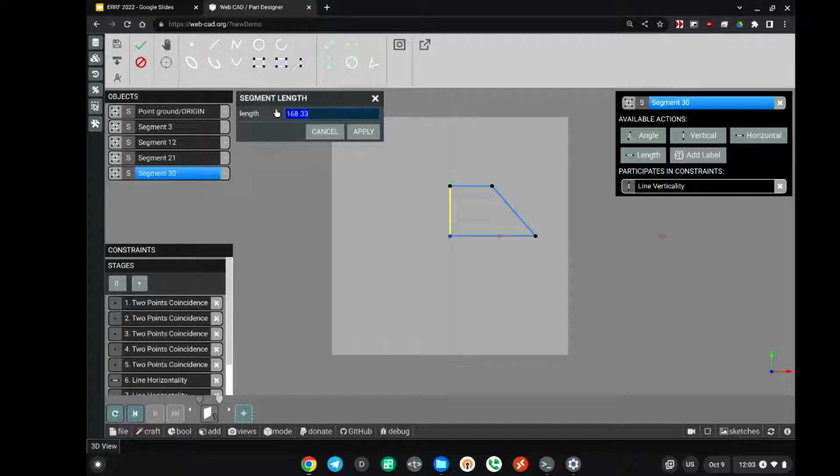I can go through and add in some dimensions. So maybe I want to go and set this to be 45 millimeters tall, and maybe I want to set this to be 60 millimeters long.

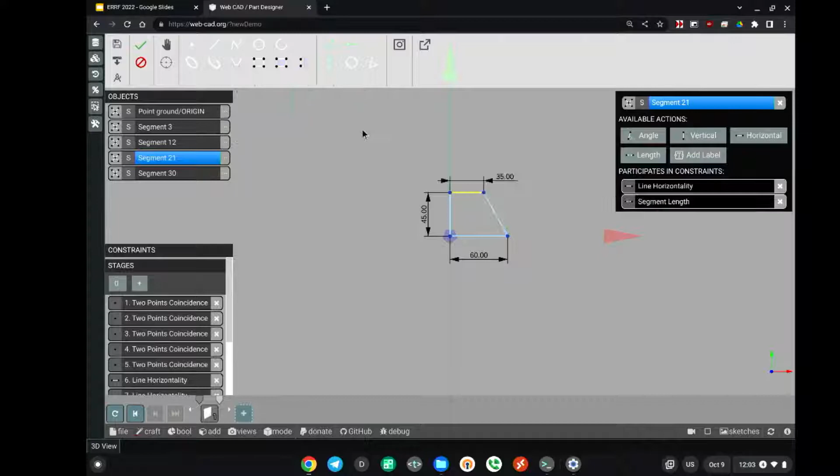And there we are, I got some constraints on there. You can see that things that are fully constrained turn blue, so you can keep track of what needs to get locked down and what isn't yet. If I add one more constraint here, we'll make this thing 100% fully locked down. So there we are, we have a fully constrained sketch. I can hit the little check box here to save that sketch.

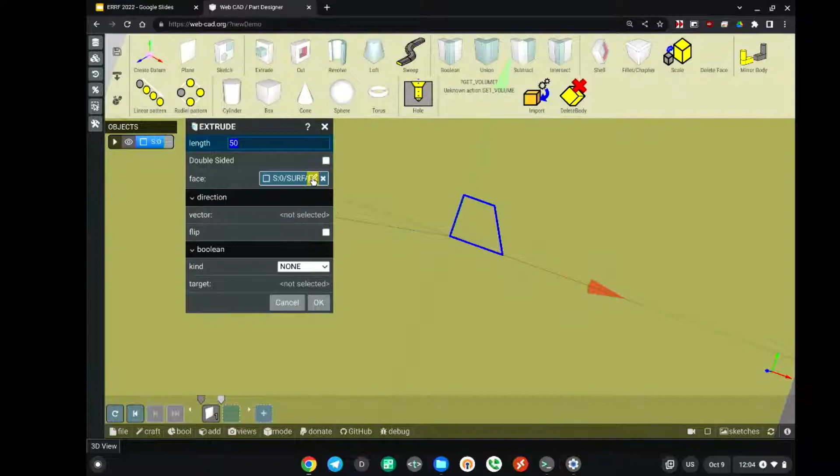Now I can use it to create some 3D features. In this example, I'll go through and do an extrude. I can specify the length of my extrude here. This right here is the selected face, which is that plane. If I want to go back in and edit that sketch, I can always click this little icon to go back in and manipulate things if I need to. But once I'm happy with it, I hit OK, and now we have a three-dimensional object that was done entirely right there in the browser.

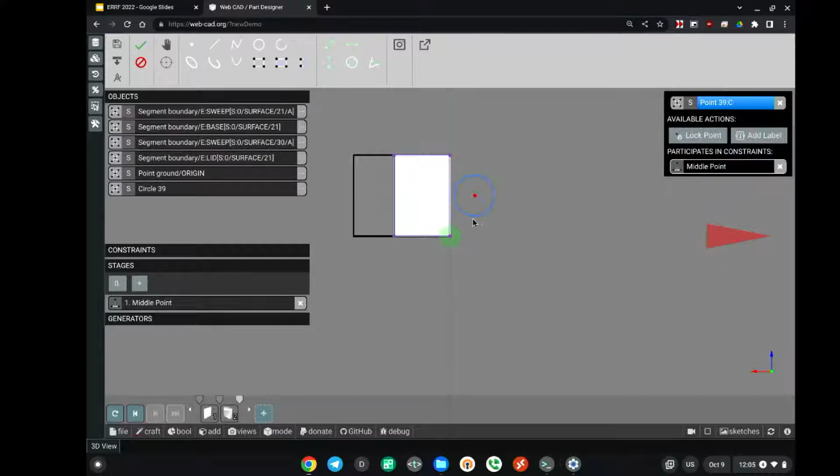Now, if I want to continue editing this and add more features, I can click on here and make another sketch right there. Let's just say I wanted to make a circle straight up in the middle here. I can draw a circle, and if I pick the center point of the circle and one of the boundary edges of the face, I can say point in the middle. So now that is locked in at that midpoint of that line. And if I want to lock that onto the midpoint of this other line, I can pick those two things, the line itself and the center point, and do another midpoint constraint.

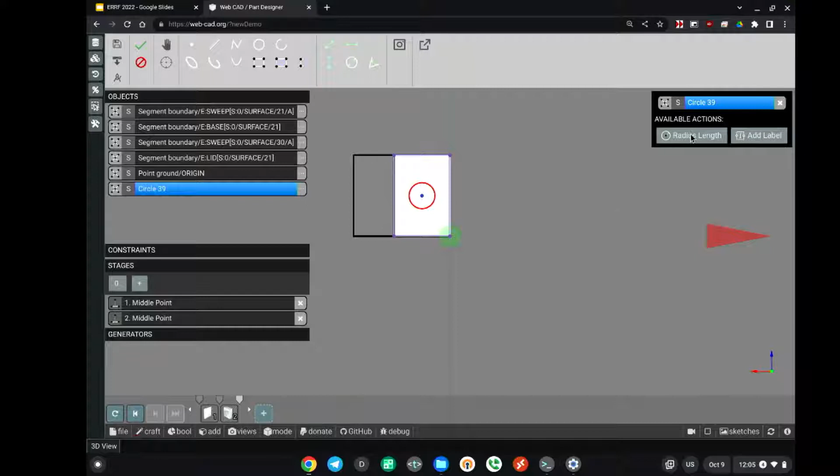So now this sketch just needs one more constraint to be locked down. If I set a radius on here, let's just say 5 millimeters, hit apply, and now this sketch is fully constrained. Now, of course, if I don't like that number, I can just double click on that dimension and change it to a different number, and finish off that sketch.

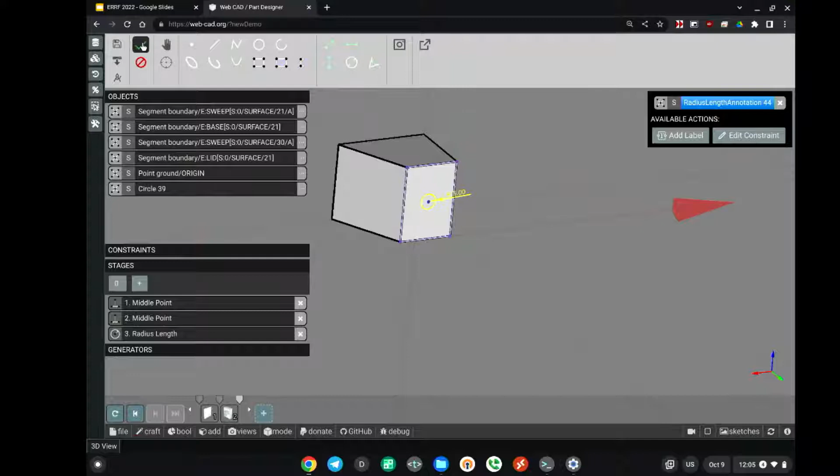Oh, where'd it go? Uh-oh. There we are, okay. Well, you know, this is what happens when we have beta software. I think the sketch is still there, so I'm going to try to make a cut with it. And I expect that maybe it doesn't work. Okay, that's lovely. You know what? I think I know what's going on here. There's something going on where if I only have one line in the sketch, it doesn't export properly. So I just added something else and made it a piece of construction geometry. Oh, well, maybe not. Well, that's nice. I love doing live demos.

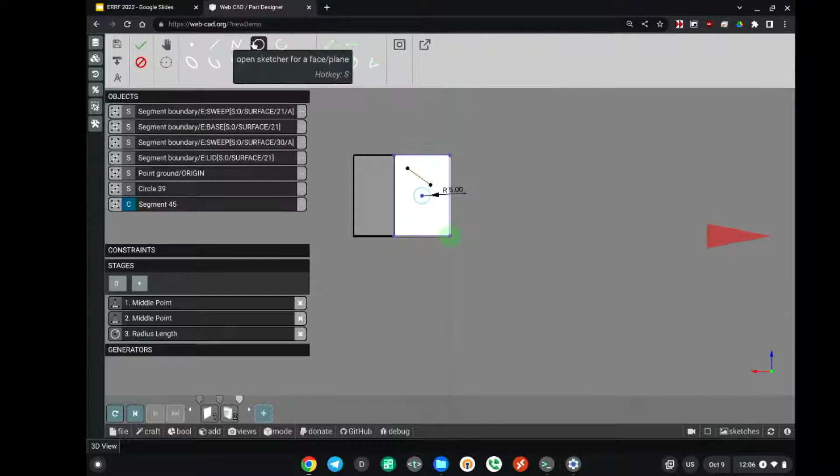Let's just try tossing something else in here, see if we get anything. No. Let's see, do we get anything? Well, I don't know what's going on there. Let me try a different face.

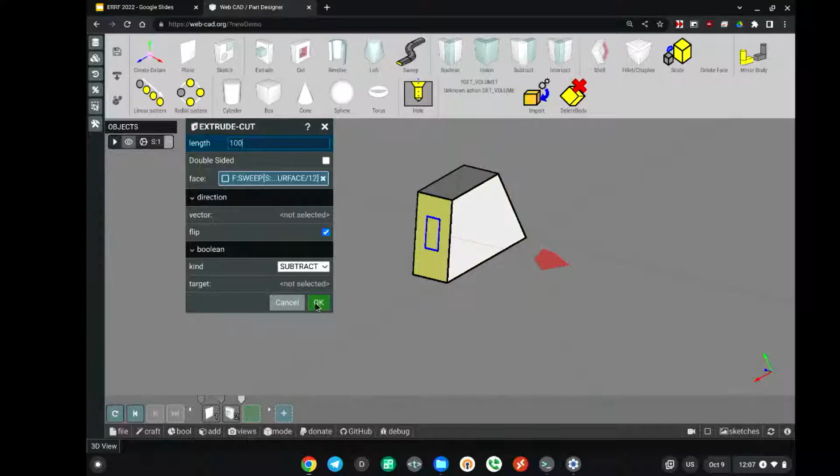I'll just draw a rectangle on this face here, and we can finish that and do a cut with that. So this is going to cut through the object, and I can set a distance on that. I'm going to set a distance that's farther than the opposite side, and we'll go through and make a cut in there. So that was done right there.

I could do some other stuff like adding fillets to an object. So if I use the fillet command, I can select some existing edges and it will round all these edges for me.

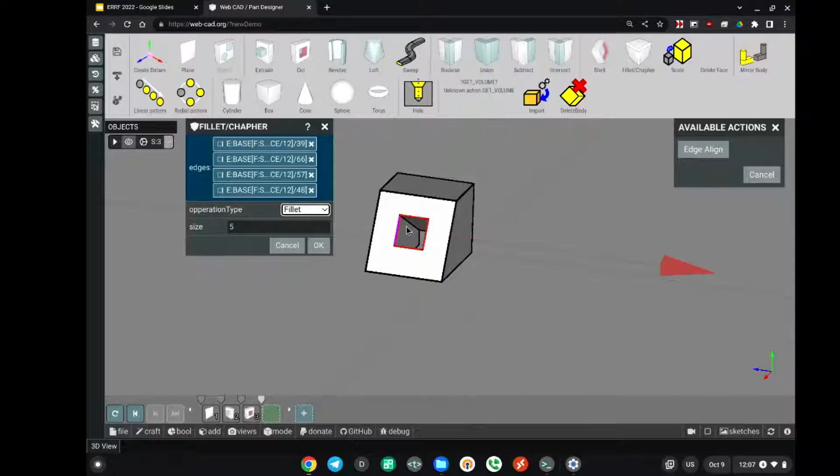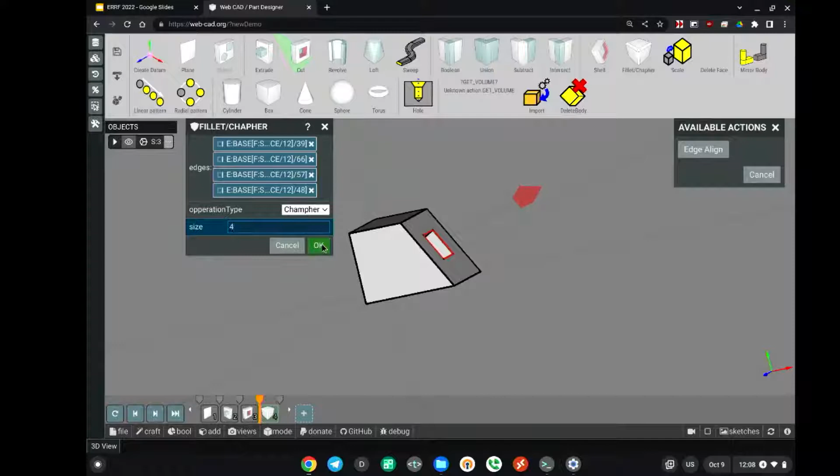Now, the nice thing about having an actual parametric modeler is that I can go back in time and tweak things if I want. So if I go back and edit this fillet, maybe I don't want that to be a fillet, maybe I want that to be a chamfer, and maybe I want the size to be 4 millimeters. If I change that, there we are. It went and adjusted the object and recomputed it.

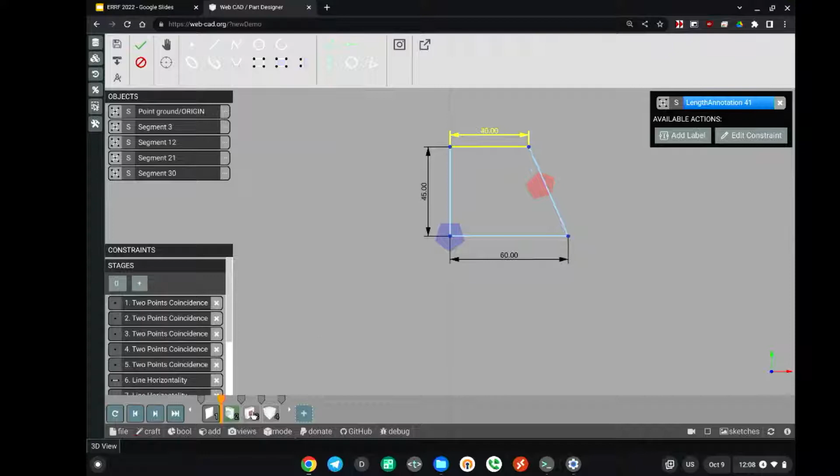And I can go back in time all the way to the beginning and change things. So if I wanted to adjust the size of this edge, maybe I want to adjust that, I can change that and finish off the sketch, then step all the way back through to the end of the part history and have everything update for me.

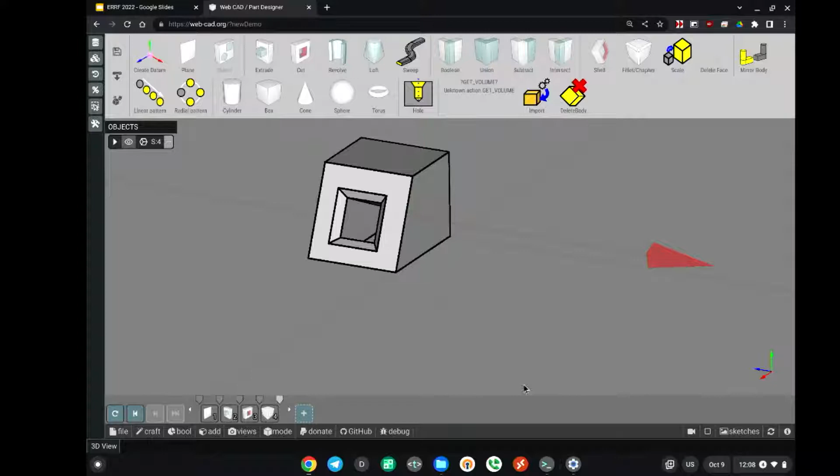That's the beauty of parametric modeling, and if you're used to SolidWorks, NX, or Fusion 360, this should seem very familiar. But the real beauty here is that this is all running on a Chromebook, so there's absolutely nothing for you to install. You can bring this into a school or any other locked-down environment. All you need is a web browser and you can start doing things.

Now I'll do another demo where I show the lofting functionality. We have the capability of doing lofts and revolves, so I'll do a loft demo here. Let's just start up a clean model.

We can start off and create a couple of datums. A datum is kind of like a three-dimensional axis that you can move around. You can either enter in numbers for it or click and drag on things. I'll create that datum over there, and I can create a plane on that datum. I'll make another one and position it over here, and maybe adjust the angle on that one by adding a rotation, so we get something that's a little bit at an angle there.

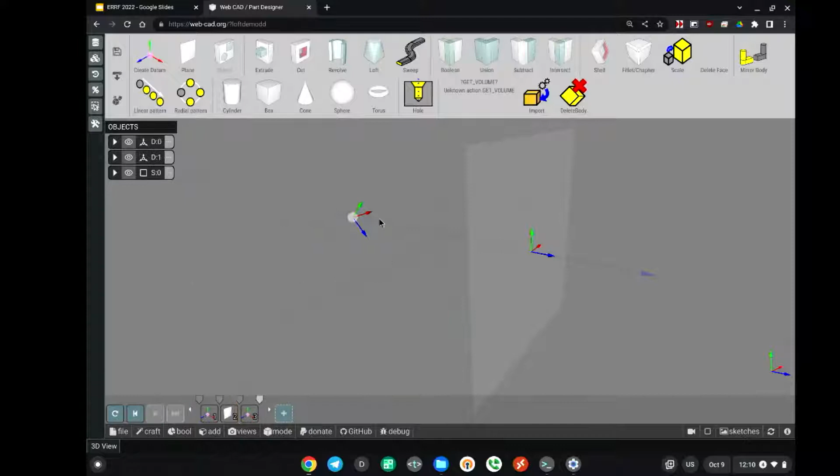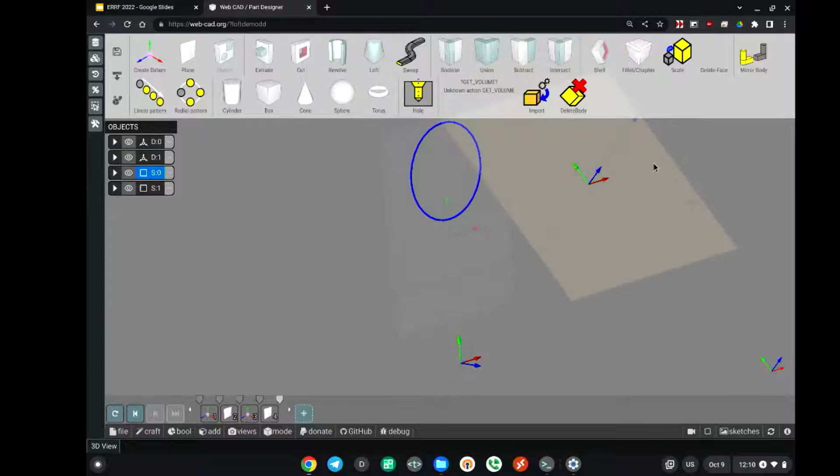And I'll create a plane off of that, so now we have two planes on different axes. I can sketch on here, and I'll draw something like a circle, and then go over onto this other plane and sketch something, like a rectangle over here for fun. Now that we have these multiple planes with different geometry on them, each one is a single closed loop.

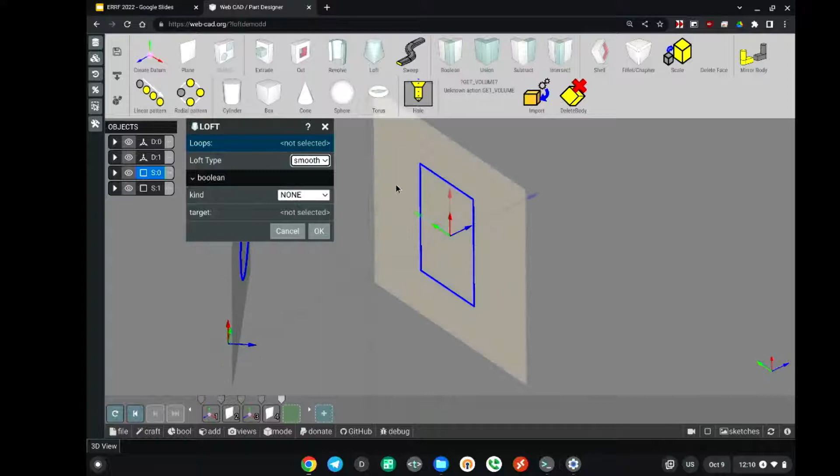We'll be able to go and use the loft command, and we will start from this one. I'll click that one, and then we will end over here, and we will create that loft, which will go in between them.

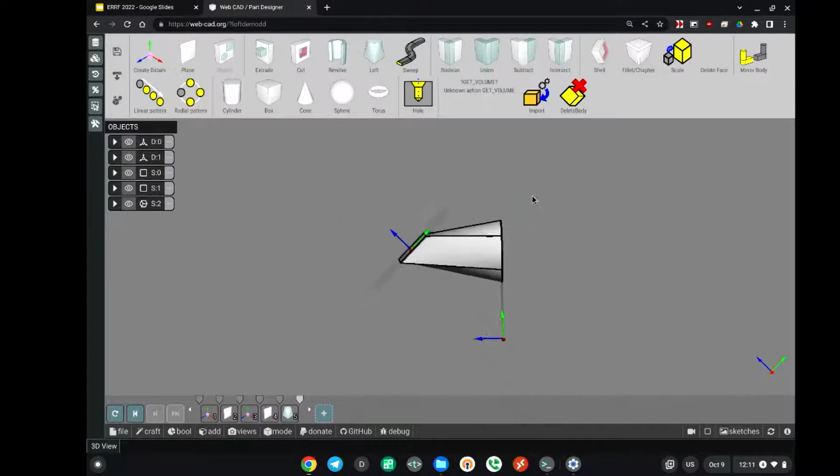We can do either a sharp kind of thing like that, and you can actually do this through multiple sections if you want. So if I go and delete that, and add one more datum out here, and adjust this one's location so that it's a ways away.

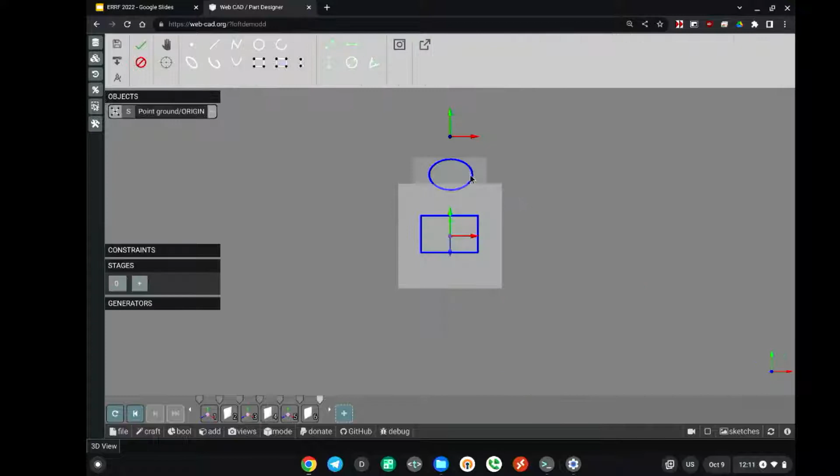I can create another plane on here and draw a sketch on that, and I'll draw another shape like that. We can go through each of those shapes. So if I do my loft, I can go from here to here to here, and we can see that it's going to smoothly make a solid that goes through all of them.

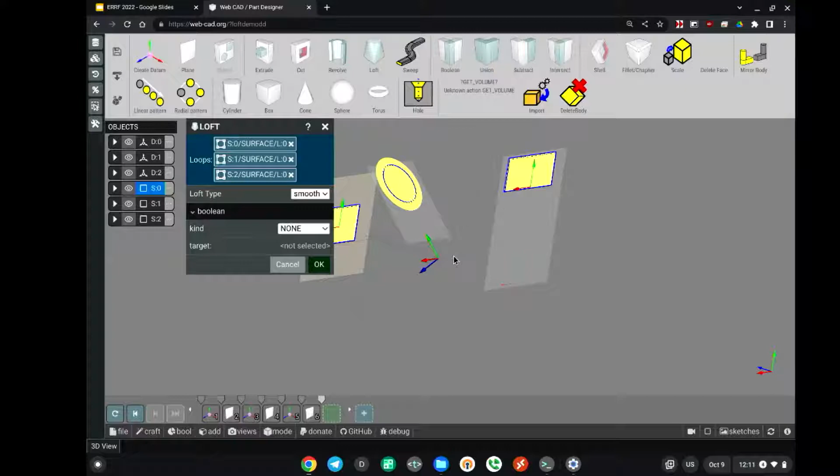If I change that, if I turn that into sharp, it's going to just go and basically do each segment separately, rather than trying to do something nice and smooth. This will allow you to make some nice, really complex parts, maybe like hand grips, things like that that you're working on.

So let's switch gears and look at the revolve command, because we have the revolve command in here. It's pretty easy to use, so I'll do a revolve demo here, and we'll open up a clean part.

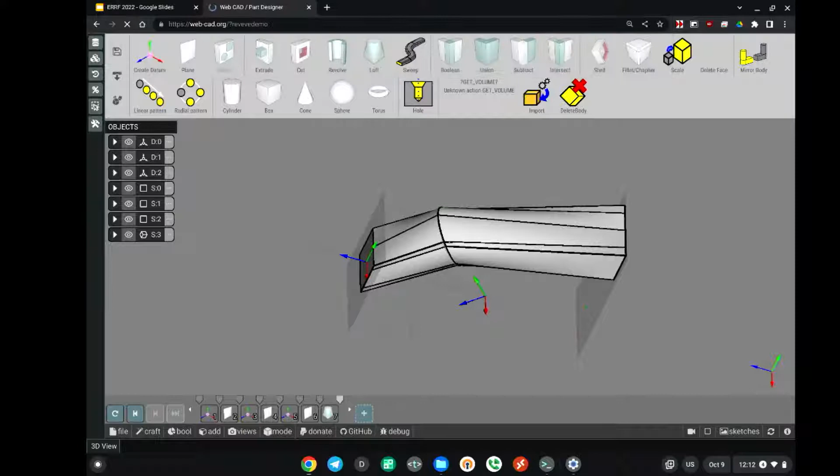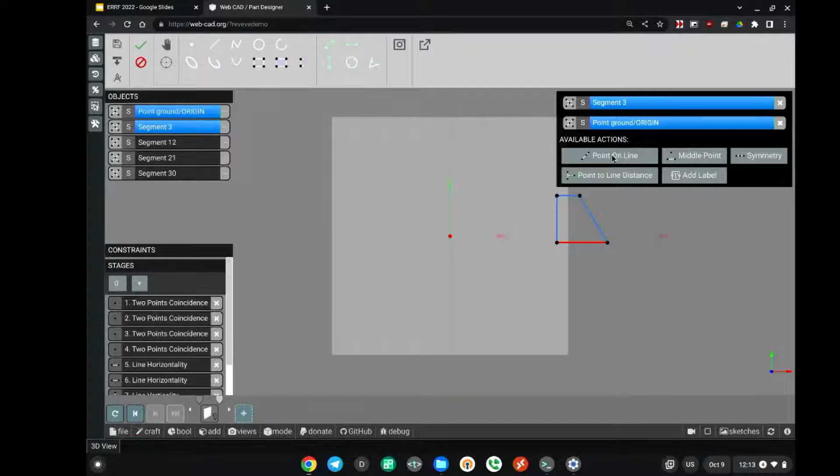So right here, we'll start off with a plane, and I'll draw something on this plane. Let's say I want to draw something like this. Maybe I want to angle one side of it, so I'll adjust that so it's kind of like that, and constrain this thing up a little bit. Let's put that point on line. Well, something is broken with my constraints right now because we had an issue earlier, but that'll be addressed.

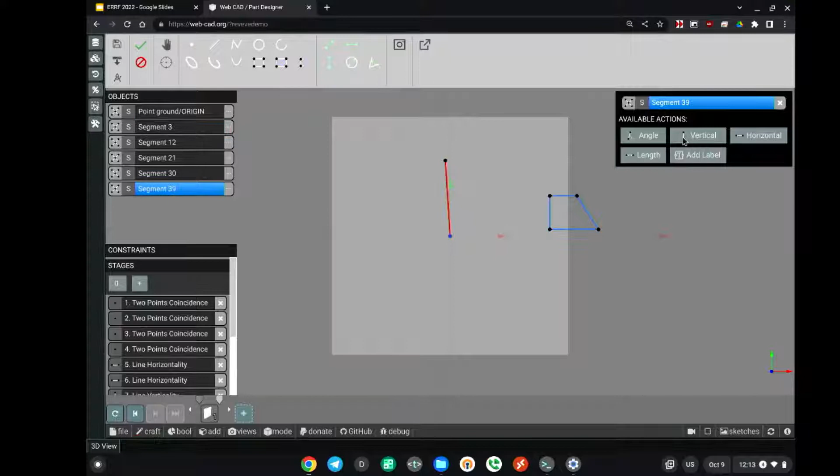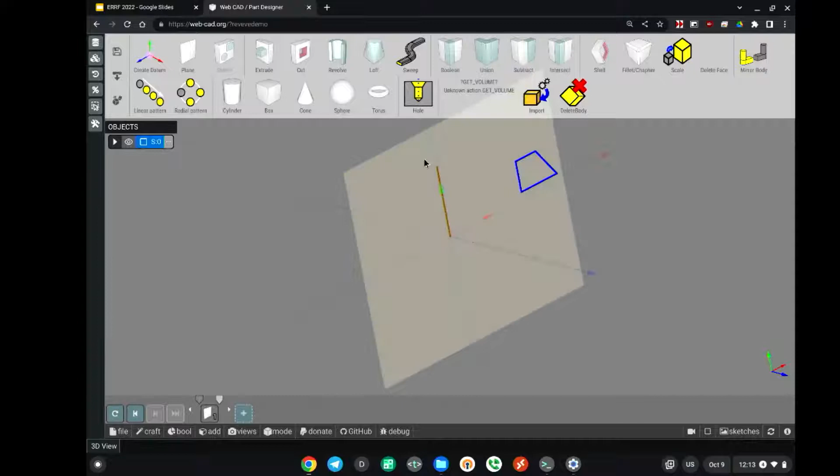Like I said, we're using beta software. But I'll draw something like this real quick. I'm going to use this as my axis of rotation, and I'm going to make that into a construction line so it turns brown. That means we're going to ignore that for the purpose of the feature, but we'll be able to use this for actually revolving the object. So I'll finish my sketch here. I have this, which I'm going to revolve around this axis, and I'll use the revolve command. I will pick this as my sketch, and I will pick this as my rotation vector.

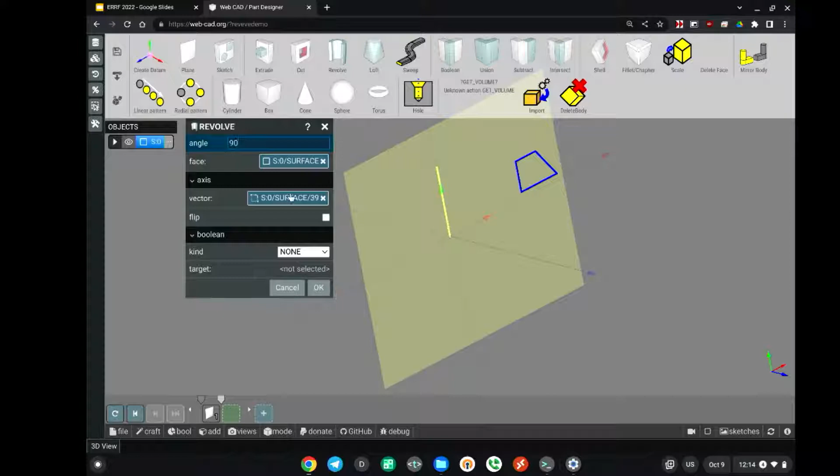And, you know, I could set an angle on here. So maybe I only want this to be rotated by 90 degrees. If I hit that and do the OK, we can see that we revolved out an object pretty easily there.

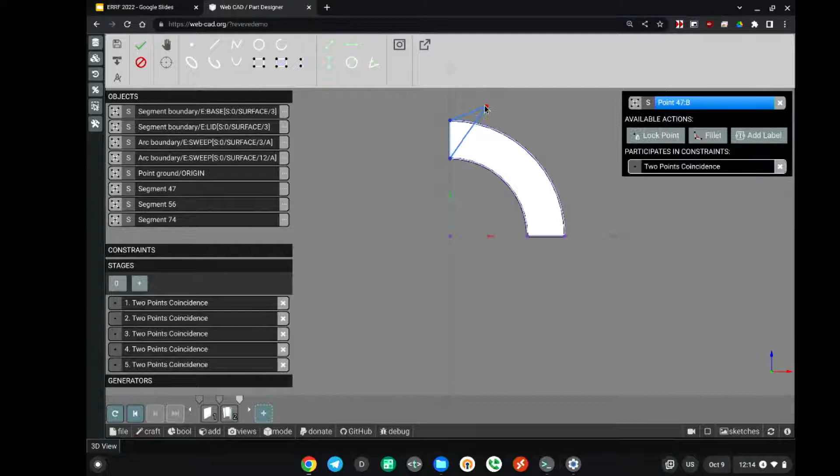And of course, I can continue editing this. Like if I wanted to go and sketch on here and maybe draw something that's going to get subtracted out, I can draw something like this. There we are, I'll kind of constrain this up a little bit. I will draw that out. And maybe we want to cut that off, so I'll just do a cut there. I will give it a length, and we will subtract that away from our object. So you can continue building on your features and doing things like that.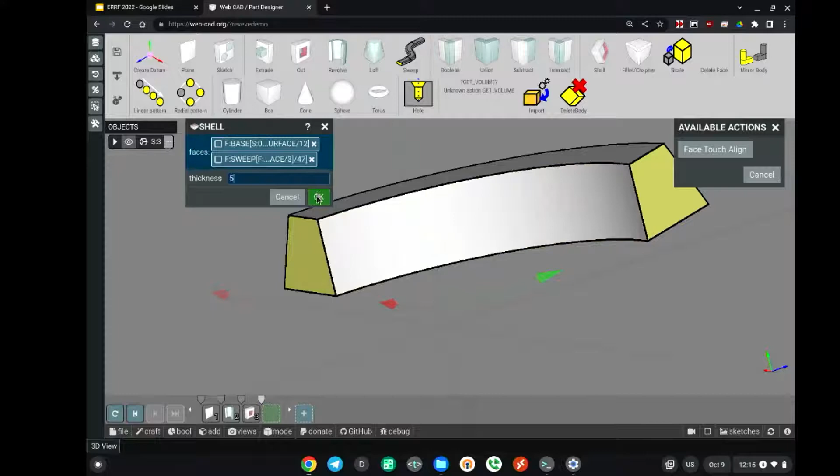Now, one of the other things that we have the capability of doing in here is we have the shell command. So if I draw an object, right, like this, maybe I want to hollow that thing out and make it so that I can do something else with it. So I'm going to set my thickness there to 5, and I'm going to pick these two faces, because what it's going to do is it's going to remove those two faces and offset every face that's on the inside into it.

So we'll do that, and there we are. We just took that object, we hollowed it out pretty easily, and of course maybe I want to make that a little bit thicker, maybe I want to make those walls a little bit thicker. So I will set that maybe to 10 millimeters, and there we are. You can see that the walls are a little bit thicker there.

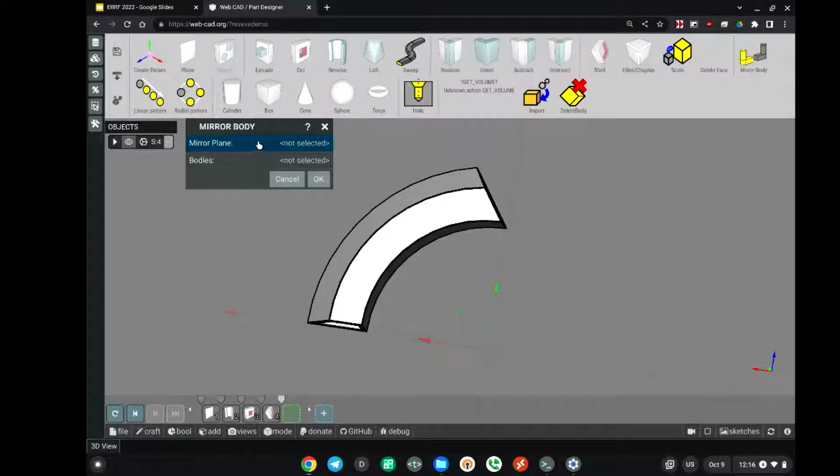Now, of course, we can do any other kind of features on top of this. We could do more subtracts, more adds. We also support some things like mirroring. So maybe I want to take this object and mirror it. So if I have that, I can pick a mirror plane. Like, for example, I will pick this face as my mirror face, and I will select this as the body that we're going to mirror. And as soon as I hit OK there, now we've gone and we've mirrored that geometry.

So hopefully you're able to see here some of the potential that we've been working on here. Like I said, still very beta, but we're looking for people to play around and test with it. And we are releasing the source code on GitHub, so we do have an open collective there where people can contribute to the development.

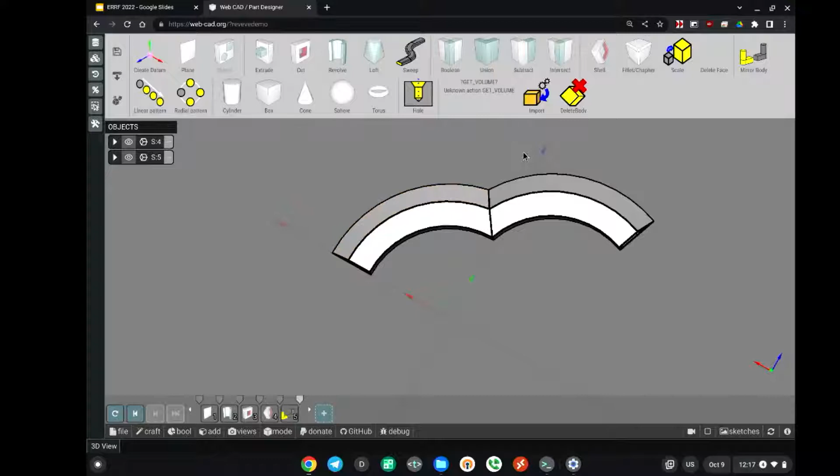Yeah, so we have export capabilities to STL. So right here, we have this little download button, and that will export an STL model. You can go ahead and use that in any slicer, or if you're in our cloud platform, if you have your printers connected to it, you can just send it straight through to your printers.

We also have the ability currently, with the application the way it is now, to import step files as long as they're not too complex. We can import standard step files. We also have the capability of importing directly FreeCAD files. Not everything is 100% supported there, but you can get a very good amount of the bodies and the detail straight out of them.

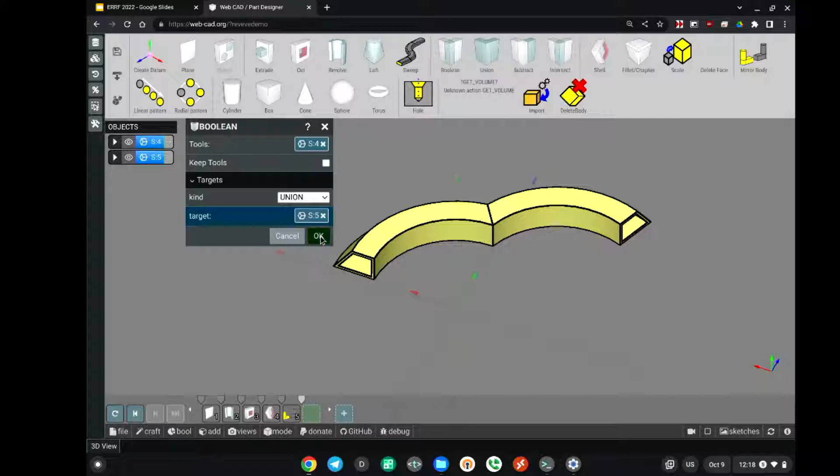So here, let me just do this. I'm going to go and do a union on these two things. So I'm going to take these two separate bodies - you can see that there's two bodies over here on the left - and unite them together. And then, yeah, so see right here how we got rid of that edge there.

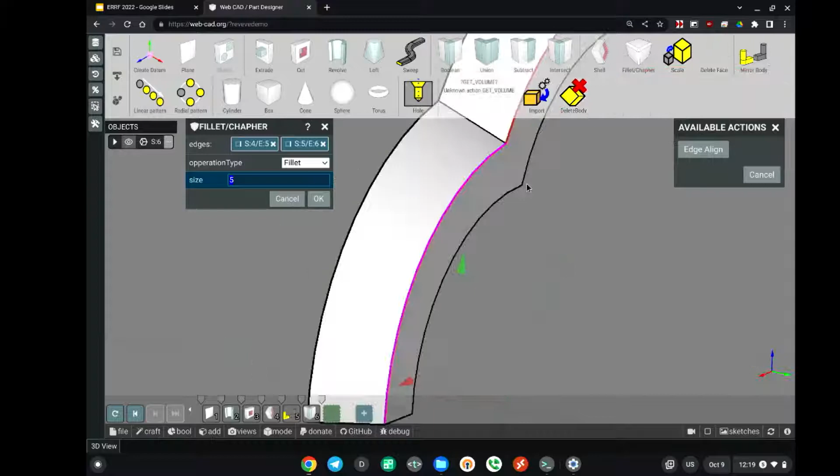So now I could do things like maybe I want to go and fillet this, and I could go and pick like these two, and maybe even this guy here. Oh, come on. Why won't it let me pick you? You know what, that's okay. There is another way of doing fillets, and that is for all the edges of a face. So if I pick those two faces, theoretically here, we should be able to fillet all the edges of those faces. So let's cross my fingers here and see if we can get that to work.

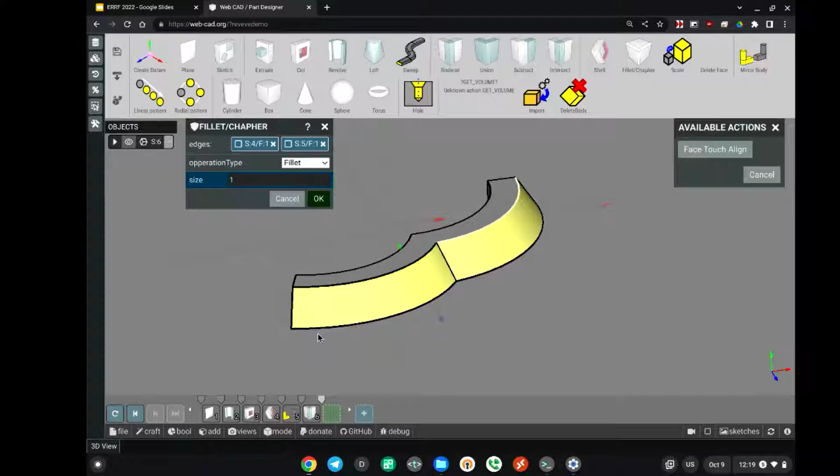Oh yeah, yep, that went and threw a fillet on there. Hold on, let's zoom in a little bit here on the side. There we are. So we threw a fillet on there, and it went and did it to all the edges related to that face.

Now, we're not 100% optimized yet. You saw that it took a little bit of time there. But keep in mind, this is all running client-side in the web browser, and this is a Chromebook, so I'm not working with a powerhouse here. This is all just very, very easy to do.

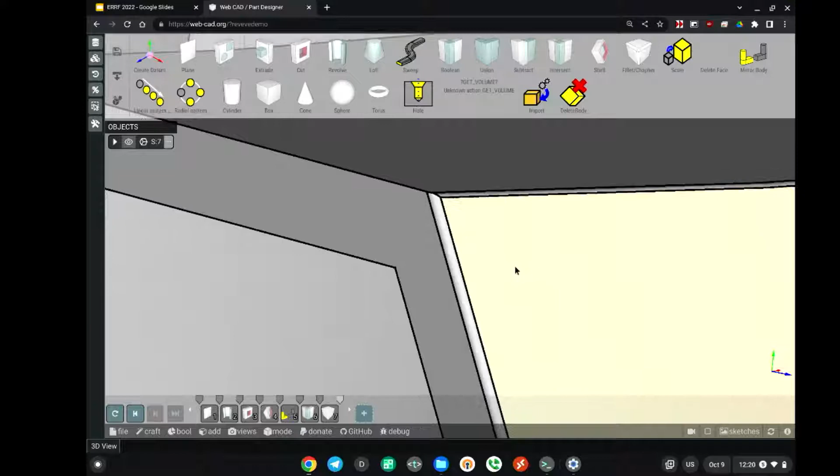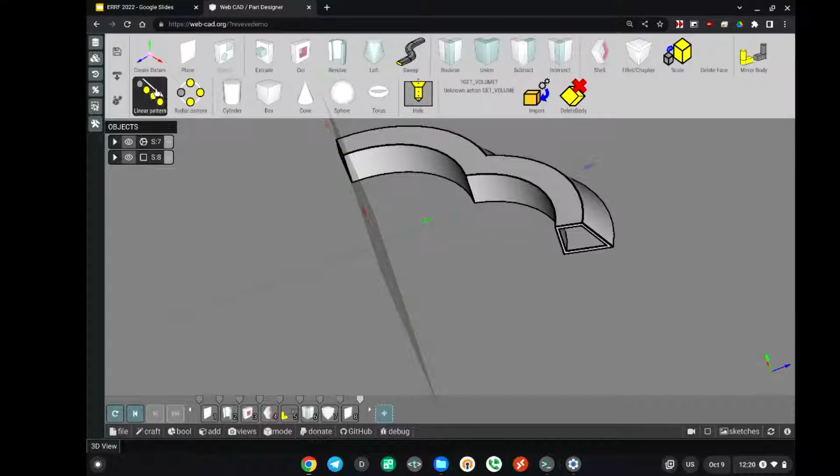Now, let me see here. So something else that we have the capability of doing is patterning, right? If you have a solid body, let me go in. I'm just going to make a plane here real quick. I can do something like a linear pattern. A linear pattern is going to take the same thing and duplicate it multiple times. So in this case, I will pick that body. My distance, I'll set this to 150 just for ease, and my quantity of 3.

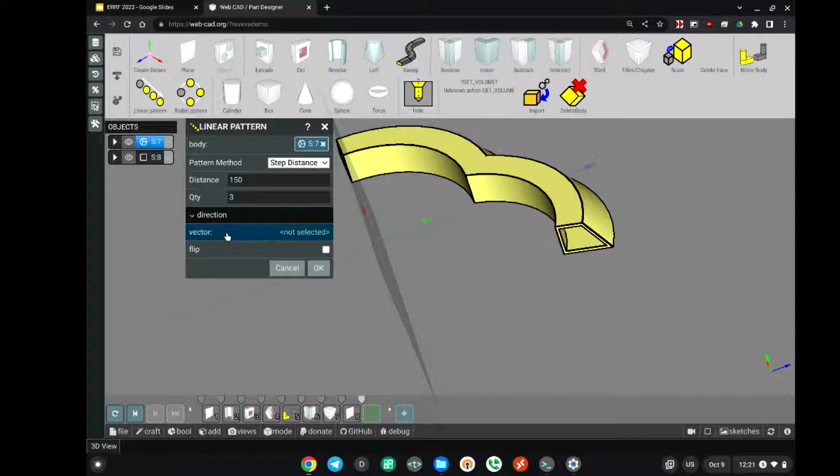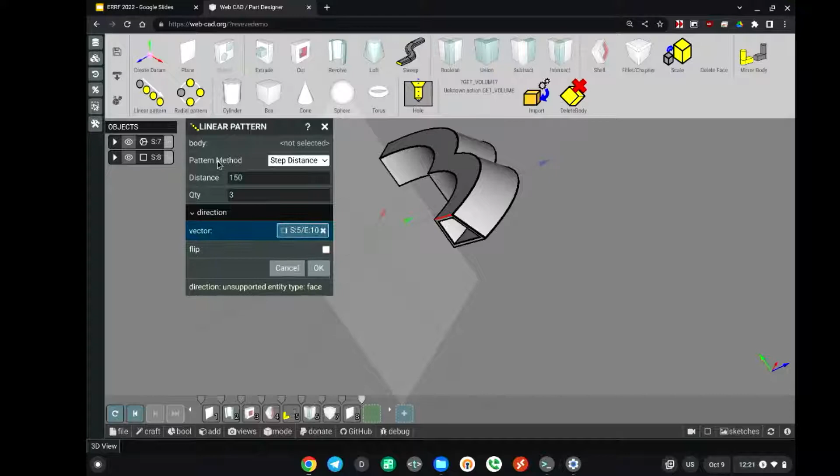Now, when we select our vector, you can select an existing edge of a model, or you can select a plane or a face, and it will do the normal vector to that. So in this case, I will pick here, and it's going to come straight from the face as far as the direction goes. And as soon as I hit OK... come on, you know what, I'm going to select an edge here for my direction instead. Select that as the direction. I'll select my body here, and let's see what we get.

So there we are. I just patterned out some objects all automatically. And keep in mind, this is all right there in the browser. So if I want to go back in and edit that, I can tweak that. And yeah, just give it a second here, it's got to recompute a couple things.

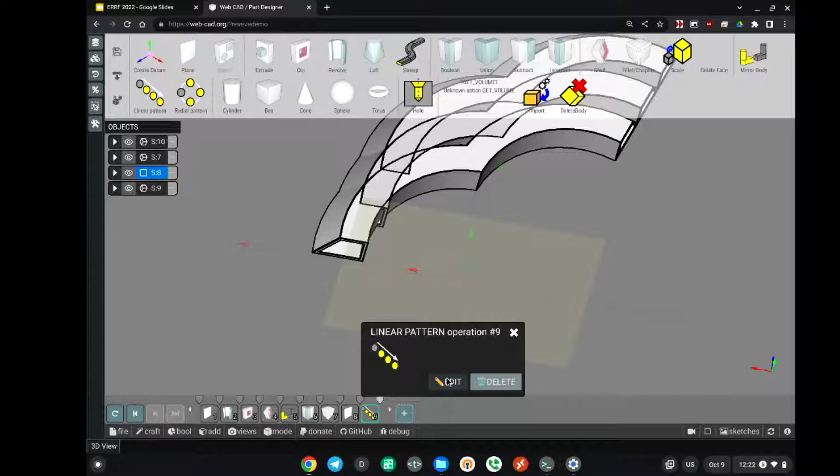This is going to become a lot faster here. We're working on setting up the caching to keep the features in memory. Right now, it kind of reruns through them all every time. But I will set this for, let's say, 350 for the distance there. And there we are, we have some objects that have been patterned out, all automatically.

Let me go and do this. So I am going to grab a FreeCAD model off of GitHub, and we will import that directly in here.

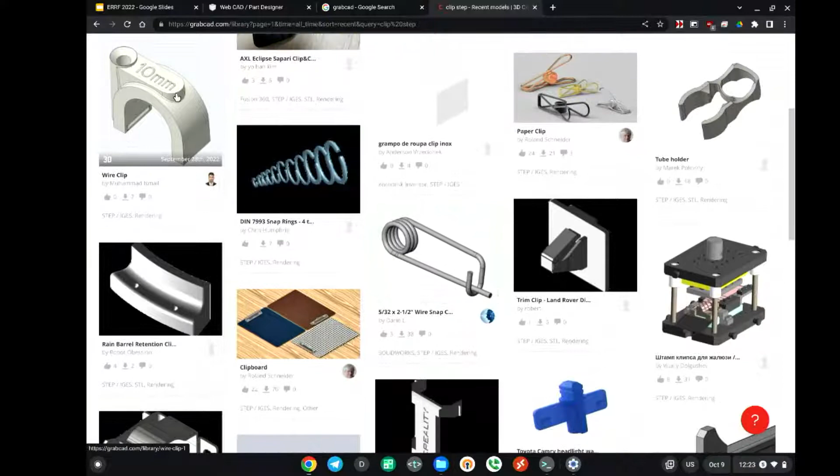So let's go on to, I don't know, let's do something off of GrabCAD. Okay, go away. Okay, so let's grab something off of GrabCAD. Let's look for a clip step file. I don't know, this one looks cool. And let's see, do we have a step file? There we are, we'll download that real quick.

And we do support direct importing of step files, so I'm going to go and just go and find that. Let's see, where did it download to? There we are, so we'll give that a second here to go and cook and go through its whole step file import. Keep in mind, this is a little risky, I never imported this file before, so...

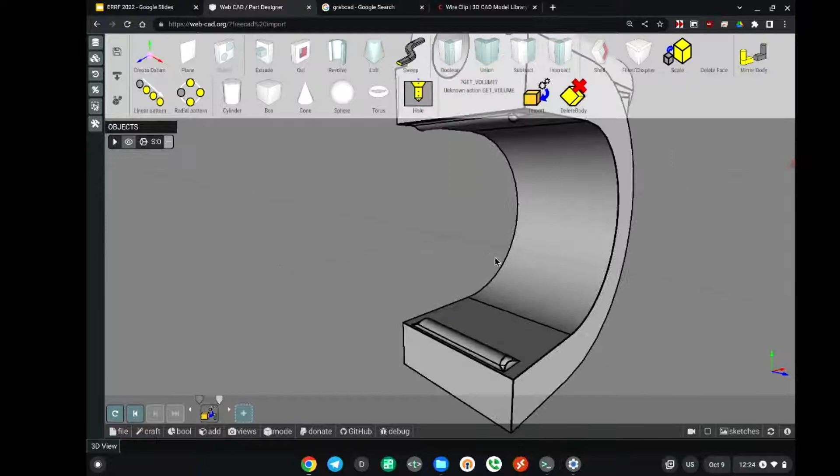Oh, there we are, so it's all imported. There's the object. This came in from a totally different CAD system, and we imported it directly into here. I can do some stuff on here, like maybe I want to defeature this a little bit. So maybe I don't like this hole that's in there, and I want to get rid of that. I can go and select those faces and make them disappear, and hopefully we'll be left with something that doesn't have a hole in it anymore.

Either that or everything catches on fire. We'll see. Wait a second. Well, it looks like that one blew up and wasn't allowing me to delete that face just yet.

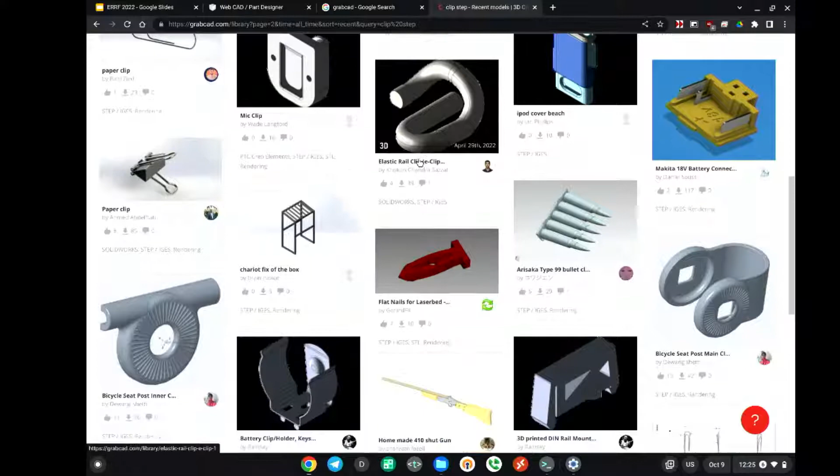But we'll go and grab something else real quick here, see what else we got for a FreeCAD file that we can import, or a step file that we can import. This looks fun.

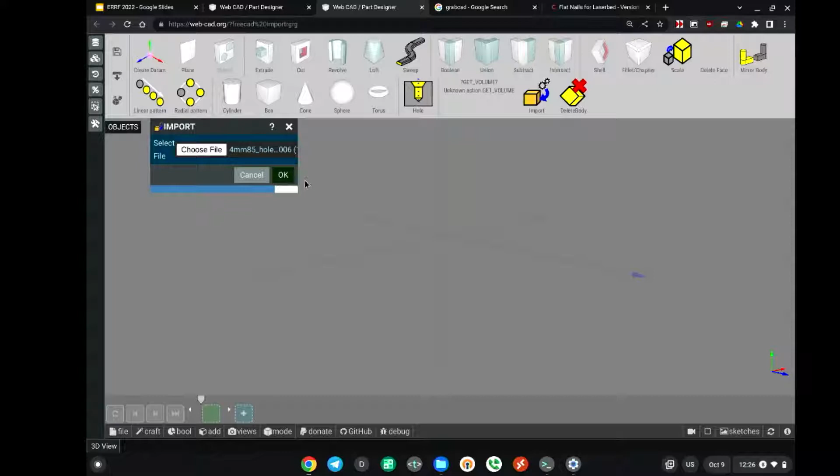I'll leave that one running. Let's go and import this other step file. Okay, so that one imported no problem. I'm not going to try to edit this just because I saw how long that last one took, and I don't want to spin up something for a long time. But this shows that we have the capability of working with CAD models from other systems and working with that data.

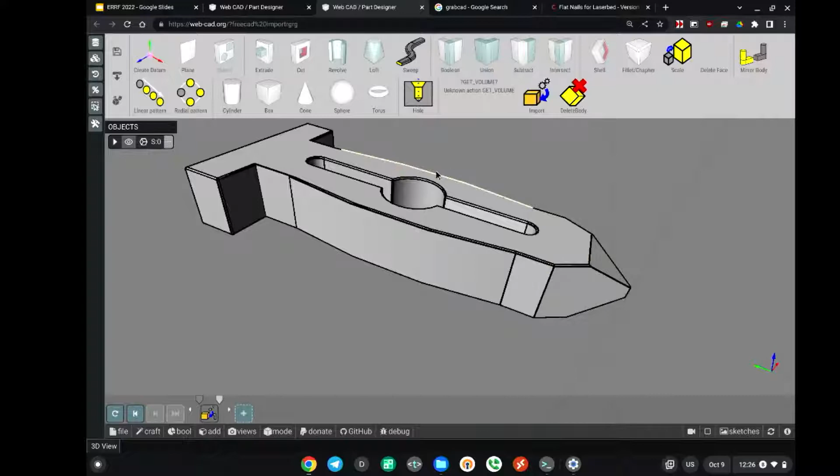You can also take a step file and convert it into an STL directly in this interface pretty easily. Again, I'll throw it out there: if anybody's got any questions or specific things you want to see, just go ahead and

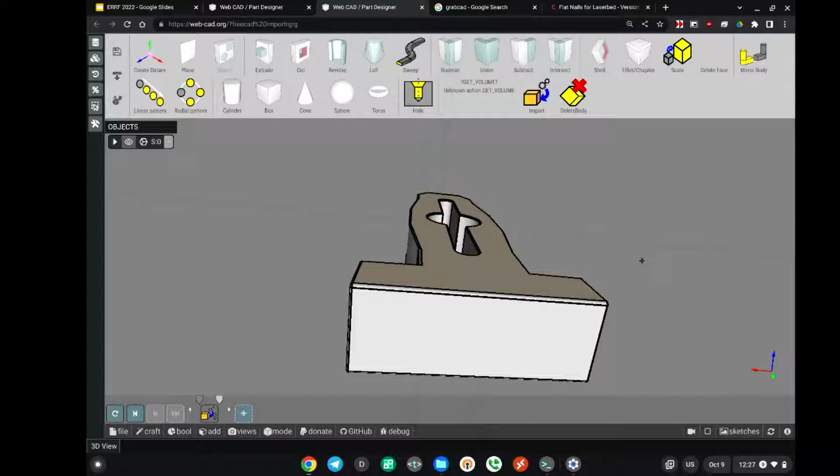throw it out. Can you export a DXF for laser cutting easily? Did you cover that already? If you did, I'm sorry.

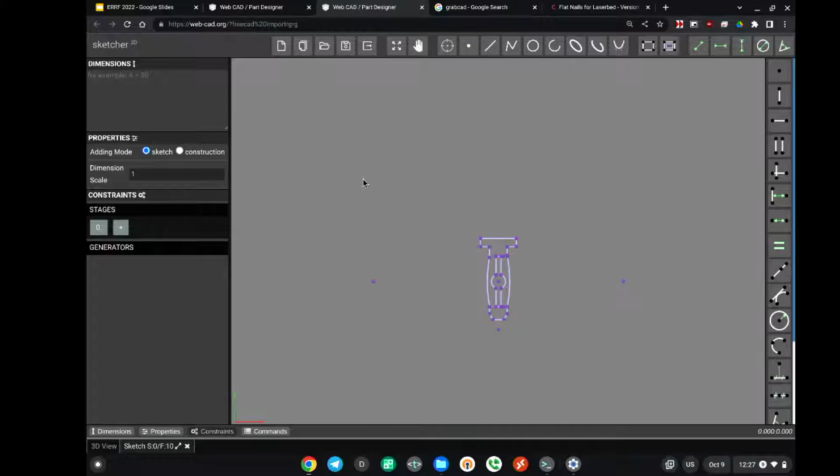Okay, so let's take a look at this. If I have a face, which is a planar face, if I go in and sketch on there, theoretically, there we are, I have my planar face. And if I go into the 2D sketcher mode, because we have a purely 2D sketcher mode, this will allow me to export as both an SVG and a DXF file. We have limited support for dimensions and annotations at the moment. We don't have them all, but we're getting there. And we don't have the capability of importing a DXF yet, but that's in the pipeline.

So I have this. If I do this, I can export DXF. And if I go and look for an online DXF viewer - keep in mind I'm on a Chromebook here, so literally everything is just straight up on a Chromebook - we can look at this sketch and see what we get, because this was off of imported geometry. And it looks like we got everything but the arcs there at the end. So pretty close. Like I said, beta quality here.

Anybody else got any stuff? Questions?

Okay, so you were asking if we can export step files. We have the APIs ready to do that. We haven't exposed it just yet, because we have to do some stuff as far as, do you want to export as a single body, or do you want to export as a multi-body? There's some decisions that need to be made there. But yes, it's in the pipeline, and we do have the capability built into the software currently. It's just not exposed. How soon do you need it?

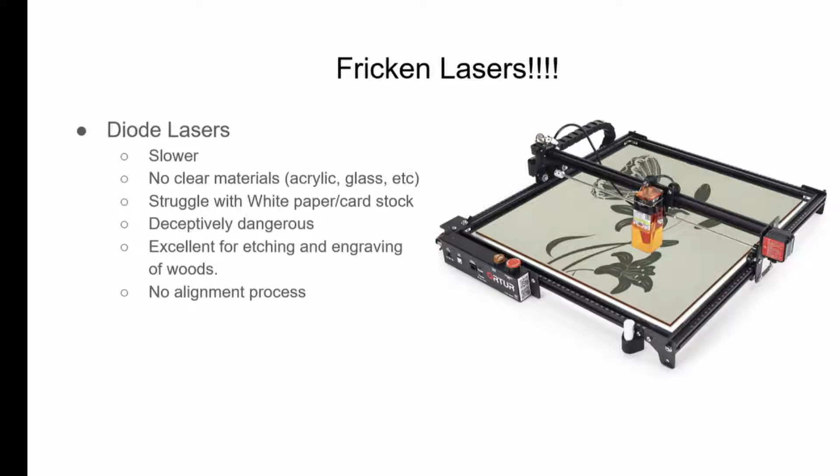But the biggest thing is diode lasers, their cost, their ease of availability, everything else makes them deceptively not dangerous, or what you would think would be not dangerous. And diode lasers don't give second chances, right? Even this green laser pointer guy, you know, he's relatively dangerous. And we're going to talk a little bit about that.

But the cool thing about diodes is they have very good beam shaping. They can make very dark etching. And there's no alignment. Oh God, there's no alignment. And so that's really nice.

CO2 lasers, on the other hand, they're big. They cut very fast. They can cut clear stuff. They can cut opaque stuff. They can anodize certain material, or etch anodized materials. But their beam's invisible. You can't see anything unless it's kind of cutting. And that's deceptively dangerous as well.

I remember the very first time I built a laser, it was all open frames and scary, and I was starting the alignment process, and I was like, it's not hitting the tape. Where is it hitting? And I noticed there was a burn spot on my wall about 12 feet away, and the paint was on fire.

Invisible lasers. A lot of CO2 lasers also require water cooling, especially the lasers that Lightburn supports. We do support RF tubes, which are typically air-cooled, but water cooling is definitely a consideration that you need to think about. And they also require alignment.

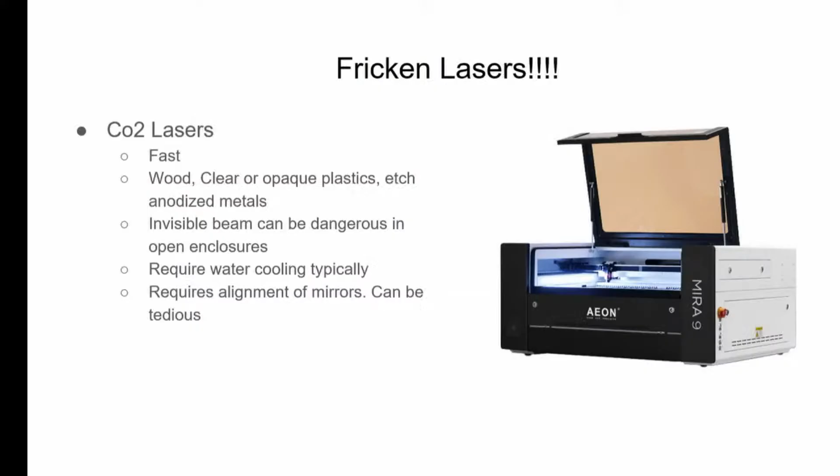The last one that we at Lightburn are really excited about, and we've got some running in our booth, is Galvo lasers, specifically the fiber lasers. Galvo lasers come in lots of different flavors - fiber, CO2, UV - and they all have different strengths. But we're specifically playing with the fiber lasers right now.

What's super cool about those is they're really fast. They don't really do good with clear materials, but they can etch just about any type of metal, with ultra high resolution and detail. I recently did a project for a friend engraving their hyper detailed logo in a 5mm area on some hemostats, and all of the detail was there - it was really cool. But they also have a relatively small work area; the biggest is usually 300mm by 300mm, and that's all dependent on the lens.

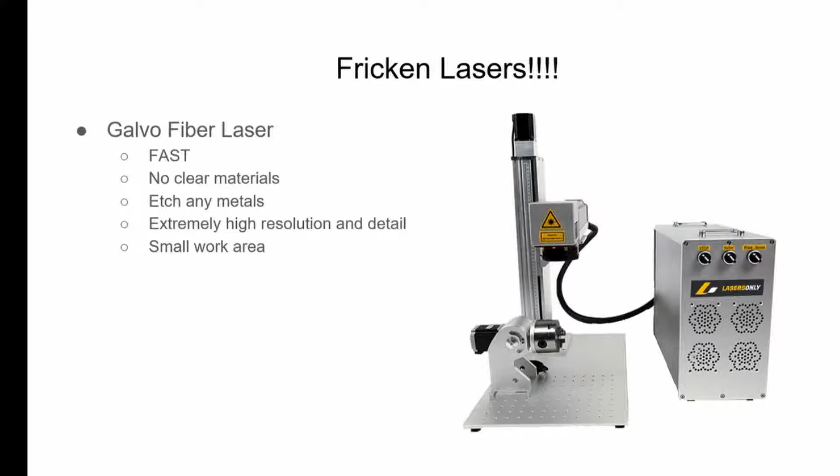The other side of digital fabrication is also CNC routers. Those are the next most common step into all of this, and another step up in difficulty often. A lot of times you can get them for like $300 for the 3018 variants. Those are pretty cool, they're good stepping stones. My favorite thing about them is they don't go fast enough to break anything, sometimes not even fast enough to break a bit. But they are also limited in their capabilities.

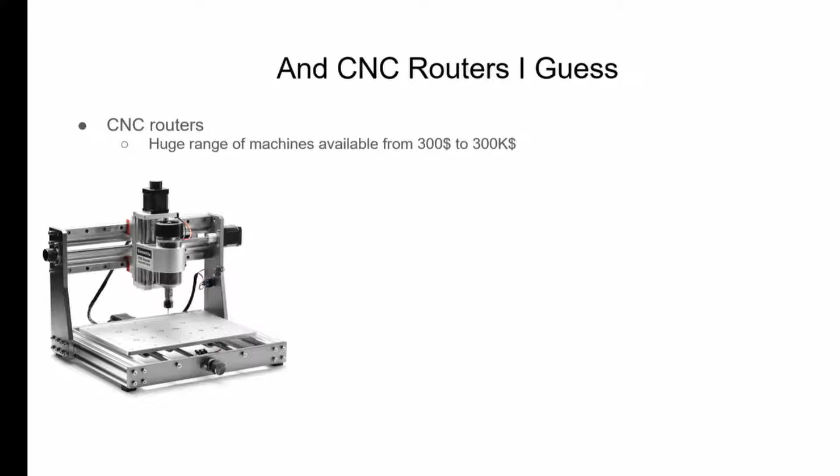Then you go up to the next step for a couple thousand dollars, and you can get a pretty decent machine from somebody like Shapeoko or Inventables with the X-Carve. By the way, I've been peopling for like 6 days now, so my brain is not doing the workies anymore, so if I stumble, I'm sorry.

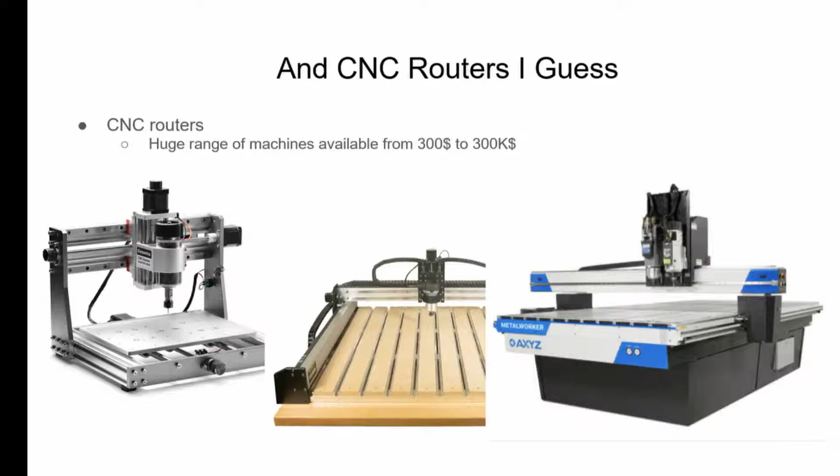Then you can go all the way up to the current national debt with some of these machines - the AXYZ machines are probably my favorite professional level machines. I used to have one at an old job where 800 inches a minute was totally okay at full depth plywood, just everything was awesome.

And they all generally work the same. If you get good on a Shapeoko, you could really easily go up to an industrial level machine. So if you're working on career building skills, this is a really good way of doing it. I've gotten multiple jobs by going, I have a CNC machine in my garage and I think it's fun. And they're like, you like this? Yeah, please, come work with us. That's fine.

So how many of you guys work in makerspaces, run makerspaces, deal with makerspaces? How many times have you heard this: somebody comes in and says, I want to go do the 3D printer. And you're like, cool, what's your widget? And they're like, you know, this little thing. And you're like, cool, we'll print that for you, 7, 8 hours, you can come back and get it. And they're like, oh, I wanted to take it home now.

Lasers are the answer. Literally nothing's faster to go from idea to part to thing and solution than a laser. But terms and conditions apply - not everything can be done on lasers. So a lot of this idea is right tool for the right job. If I just need a square piece of plastic, I can totally make that on a 3D printer - it's gonna take a couple hours, it's not gonna be as good. I can make that square piece of plastic in 19 seconds on a laser. Fast, TM.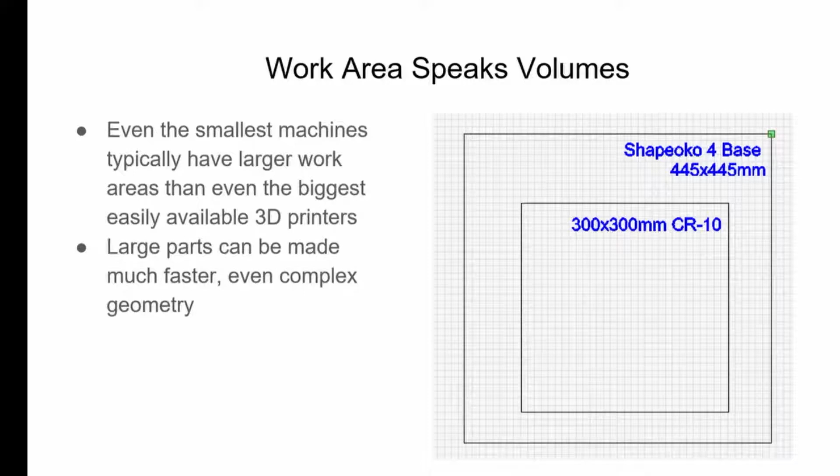The other cool part about digital fab is even the smallest machines, the smallest 3018, the smallest Shapeoko, they're going to be bigger than our biggest 3D printers. So if you need to make big stuff, you can make big stuff quickly, easily. And my favorite part about a lot of these machines is you can grow with them.

My very first CNC router had a build area of about 8 inches by 8 inches, and I used that machine to build the next machine that had a build area of like 18 by 18, and then I used that machine to build the next machine, and that machine had a build area of 24 by 48, and the next machine, which is now a full sheet machine. So like, they grow exponentially. They're like mogwai when you give them water.

And you can do all kinds of cool stuff that we can't do with 3D printers, right? So we can do woods. Sure, we've got wood fill, but wood fill doesn't give the same properties. And people poo-poo wood, especially when you build machines out of wood. But as Joe will tell you, you can build a CNC router out of wood, drop it out of your car, it'll break the car, it'll break the ground, and it won't break the machine because wood is flexible and it does things. We build houses out of it for a reason, right?

We can cut metal with CNC machines, CNC routers, CNC mills, CNC lathes, and sometimes lasers if you get the right one. What else? And we can do really cool plastics.

You can print PMMA acrylic, but it's hazardous and kind of hellish to print. You can print Delrin, but good luck getting it to stick to anything that's not Delrin, and you have to remove it with a bandsaw. You can do all of these things really, really easily with these digital fab things, and then take your next steps, build your next materials, or build your next things.

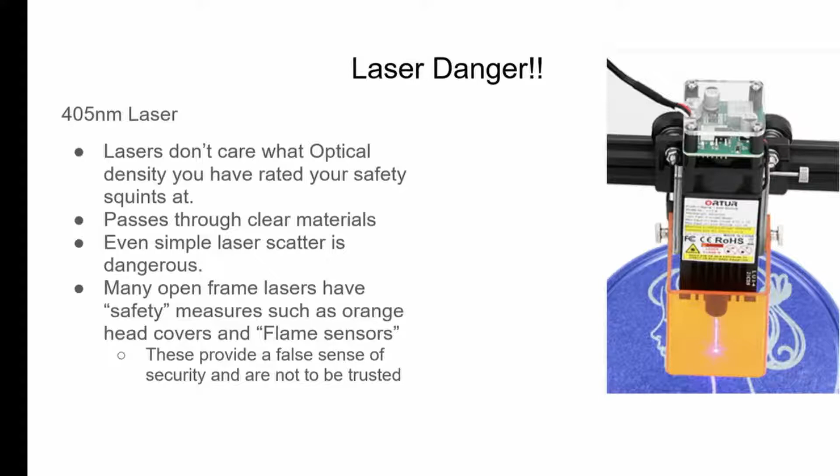Danger. This is one of the things we don't talk enough about, right? Lasers don't care about anything. They don't care if your machine goes wavy. One of my favorite problems I've ever had is my gantry sagged and the light didn't. And that created all kinds of interesting reflections that were dangerous as heck. But the biggest thing is, lasers don't care what optical density your safety squints are. If you do this, it's going through. It doesn't care. And they don't give second chances.

A YouTuber that reviewed high-power laser pointers, like Wicked Lasers, once said that lasers should be treated like loaded handguns. You only point them at what you want to shoot and nothing else. Laser cutters are the same way. The scatter's dangerous. The laser itself is dangerous. The fumes they create are dangerous. Everything needs to be thought out. And when you buy a $300 Ortur, they don't tell you that. And half the time, those goggles that they send you don't have an optical density printed on them. And if they did, I'm not sure I trust it. You only get one set of eyes.

Also, we got this. Diode lasers have a wavelength of 380 to 405. Lots of those goggles kind of skirt around that you get sent. So it's really, really, really important. OD6 Plus, we like OD8 at Lightburn. Even then, don't look at the laser while it's running, whatever. But the biggest thing is never, ever, ever, ever run a laser unattended.

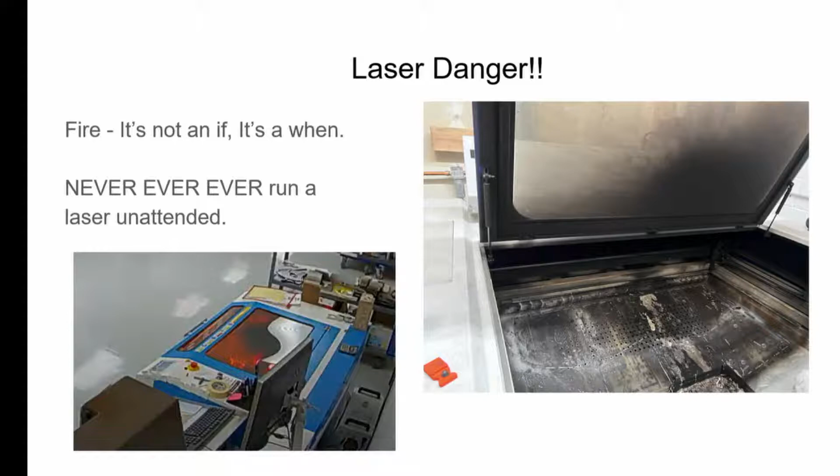Laser fires are quick and they happen fast. The one on the bottom was posted on Thunder Laser's website. There's a whole video where you can watch it happen. There's a guy running it. It comes up quick, it comes up really big. So they're not an if, they're a when.

Be ready. All right, so we spent a lot of time talking about what digital fab does well. Sometimes it doesn't always do well. 3D Systems used to always like to say complexity is free with additive manufacturing. And anyone who is an additive manufacturing engineer goes, don't say that. That makes it hard.

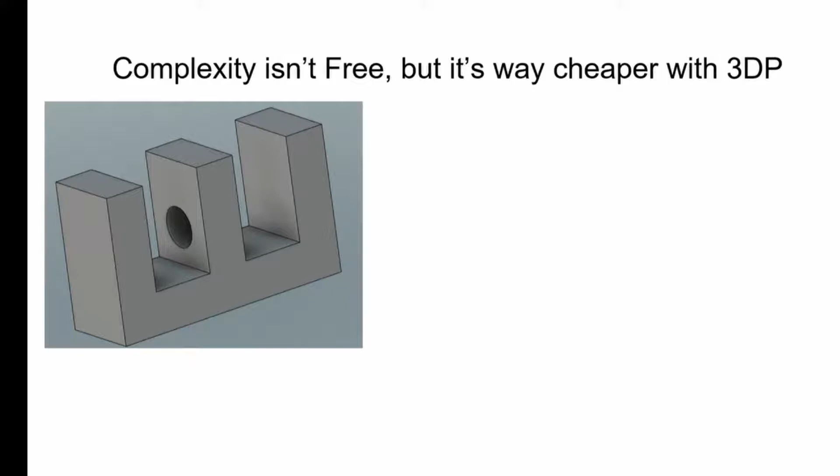It's way cheaper with 3D printing. So I used to work in a prototype shop for a Fortune 50 manufacturing company, and we get brought things like this all the time by design engineers to machine. So if you're going to machine this, how do you put that hole in the middle? They don't make 90-degree drills. They don't. And we get brought these things by engineers that had never made anything, and they'd say, well, I did it in CAD, why can't you do it on the machine?

And I'd say, well, I guess we could cut it in half and weld it back together. Well, that's not going to meet spec. Your weld won't be good enough. Well, design it better.

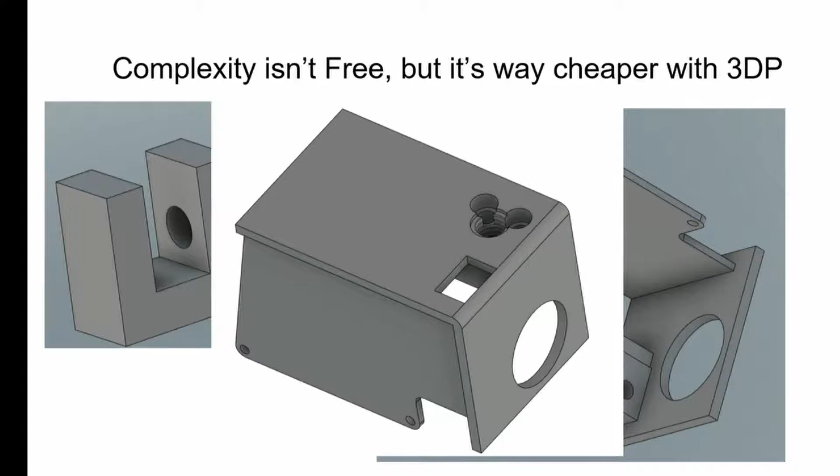I recently got sent a part that looked like this to machine. It was designed by somebody who had 3D printing in mind, but they wanted to machine it. That little thin bit is about 2 millimeters. It was about 2 inches long, huge stick out. There's like 70 different operations to hit all the different things. It's not a good candidate for traditional manufacturing, at least the way they wanted it.

But maybe we could do it with bending sheet metal. Maybe we could do it with something different. All right, and then we have this stuff. This is, oh my God. Help me, Joe.

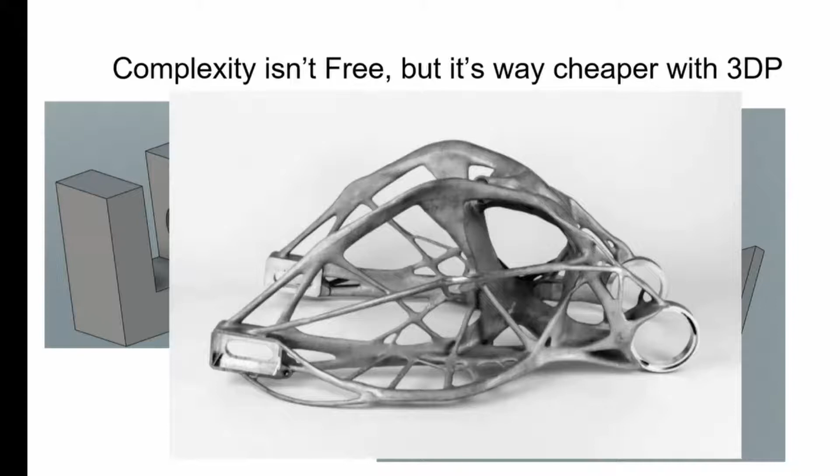Generative design, thank you. You define some constraints, you tell it where you want the strength, you tell it where you need the precision, and then it makes this cool organic skeleton thing that we could only ever 3D print, right? Some of the generative design programs out there, you can define operations. You can say, I'm going to make this with a 3-axis mill, and it might look a little normal. Or I'm going to make this with a 5-axis mill, and it gives you some things that you can attack from different sides and some places to hang on to. But when you're trying to make weird stuff like this, 3D printing is still better.

So it's a right tool for a right job problem, right? But sometimes you only need 2D. 2D design is a lot less prevalent than it used to be. When I started in all of this, everything was 2D AutoCAD. There were all kinds of 2D AutoCAD clones, and we all designed in it.

But when you're moving over to a digital fab process like CNC routing or laser cutting, a lot of times that 2D design is way easier to deal with. So we take a 3D design out of Fusion 360 or SolidWorks, create a 2D DXF, and bring it into CAM programs like Cut 2D or Lightburn, and they're just way easier to deal with.

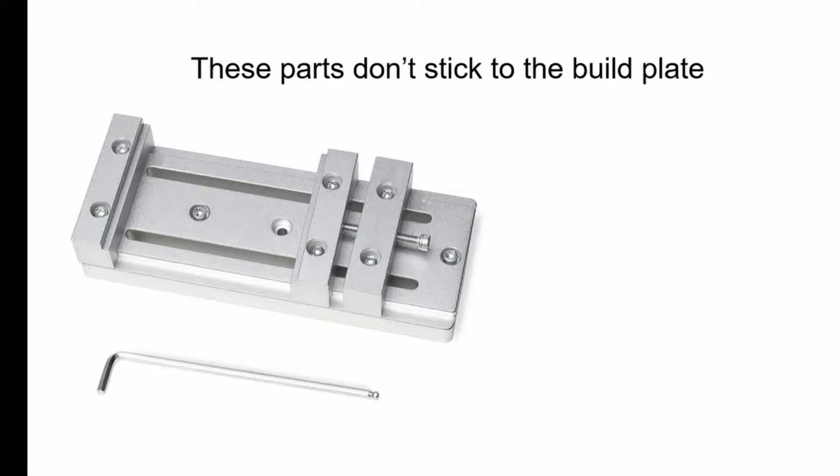Other problems you're going to run into: parts don't stick to the build plate in the machining world, so you have to figure out how to hold on to them. Fixturing is the hardest problem in all of this if you're machining things. There are people who spend their entire lives dedicated to figuring out creative ways to hold on to things so you can make things. Vices are one way.

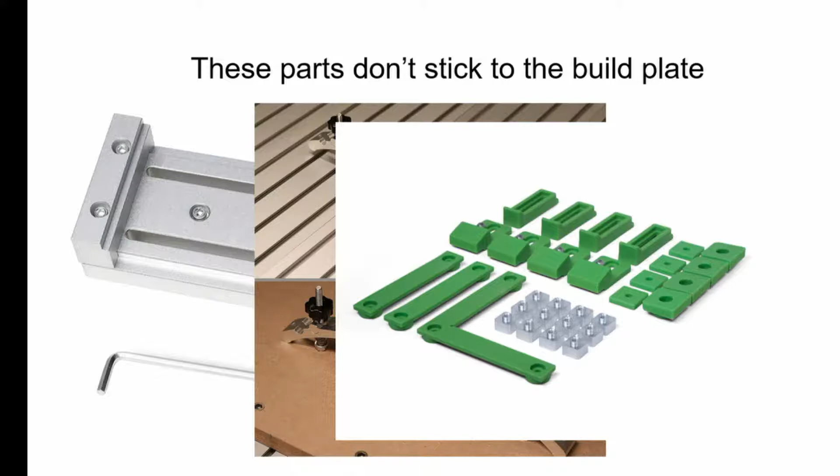Little toe clampy dudes are one way, little pushy clamp guys are another way, but all of those have an issue - they all stick up above the part, they involve figuring out clearance, and they'll break your end mill off when you rapid across them. This is my favorite method to fixture things for CNC routers: just put some screws in it. It fixes all of your problems. Most likely your end mill might survive cutting one. Hardened screws are interesting - it's always fun to watch it rip through some MDF, and then all of a sudden fire shoots out, and you're like, whoa. Ah, you're still cutting, all right.

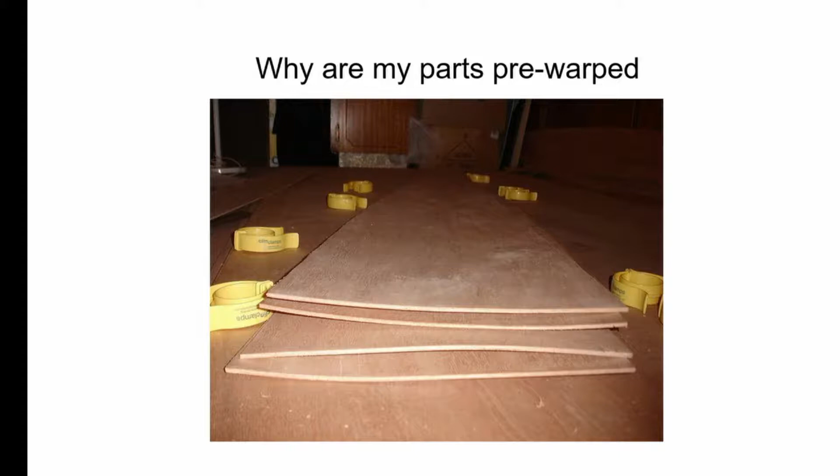The bane of laser cutting: pre-warped material. This causes all kinds of problems. Your parts might be warped at the end, they might cause assembly issues, but the biggest problem with warped material in laser cutting, and I guess CNC routing, is the fact that the change in elevation will change your focus. So things that are cutting perfectly because they're perfectly in focus, and then it goes up, suddenly you have a Sharpie-wide line and little spots in your material that didn't cut all the way through. So we have to figure out creative solutions around that.

My favorite way is quarter-inch steel plates, like 3 inches wide. They're really cheap to get. Most of the time your focus distance will clear them, so you can drive right over them and they never matter. But that's one of the ways I deal with that on a regular basis.

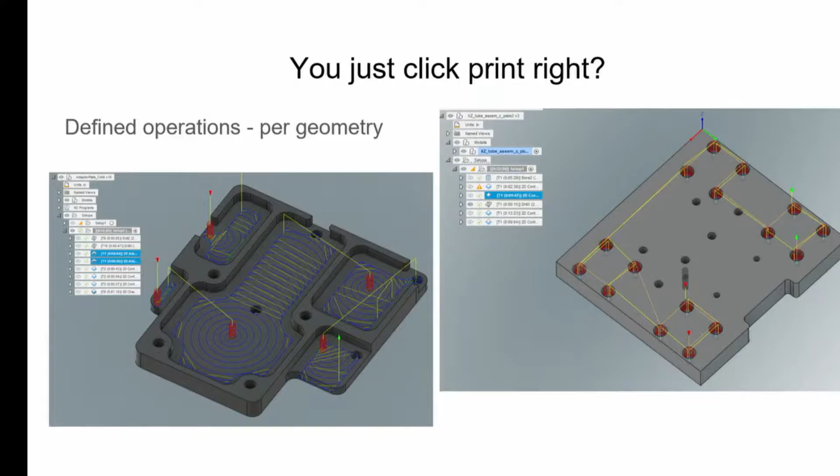One of the stories I have from my career as a CAM engineer: there was a guy who ran our additive manufacturing lab back before additive manufacturing was called 3D printing. He came in and sat with one of the old graybeards and said, 'Jim, I'd love to learn your job, I'd love to learn how to program CNC machines.' We said, 'Okay, we'd love to teach you.' He said, 'I think we could probably figure out how to do that in like an afternoon, right?' He'd never touched a machine before, never understood, but it was such a departure from the machines he was running, the Stratasys machines, the 3D Systems machines, that he just loaded things in, oriented them right, figured it out, made sure there were no voids, and hit print.

So with CNC routing, and to an extent with lasers, all of our operations are driven by feature geometry. The shapes of our parts, the areas we want to cut - a lot of times we'll use those shapes multiple times. It's not just as easy as loading your part in, setting your orientation, and hitting go. But it's also not that scary. You just have to give it a little bit of thought.

So that's what I got. I'm awful proud of myself. I kept it within mostly time.